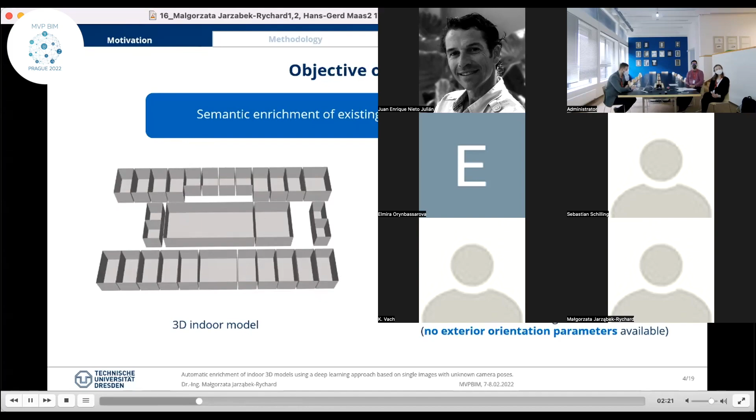The goal of this work is then a semantic enrichment of existing indoor models by window objects, using information provided by RGB images taken by hand using an amateur camera. A very important assumption underlying this methodology is its feasibility for consumer application. This means that the images are assumed to have unknown camera poses. The innovative idea of the presented solution is a parallel semantic recognition of the target objects in the image with their automatic positioning in 3D space.

Our approach goes beyond pure texture matching and matches deep learning detection techniques with camera pose estimation and 3D object reconstruction. The algorithm starts with a joint detection of window target objects and the spatial layout of the corresponding room. The layout of the room extracted in the image is then matched with a 3D model. This allows us the 3D reconstruction of the detected windows, which is solved by photogrammetric projection. And finally, the extracted window objects are subjected to global regularization.

The presented methodological pipeline of image processing starts with the detection of chosen indoor objects in the RGB image. Besides target windows, we also aim at the detection of walls and ceilings, which are crucial for the extraction of the room layout, so of the edges of an indoor cube. To perform this detection task, we apply Mask R-CNN, a robust deep learning detection framework.

The results returned by Mask R-CNN at that stage are partially overlapped and also can have irregular boundaries. To improve these drawbacks, we apply morphological difference and subtract wall objects from the ceiling, which allows us to obtain a more regular ceiling shape. And in the last step, we extract the ceiling outline.

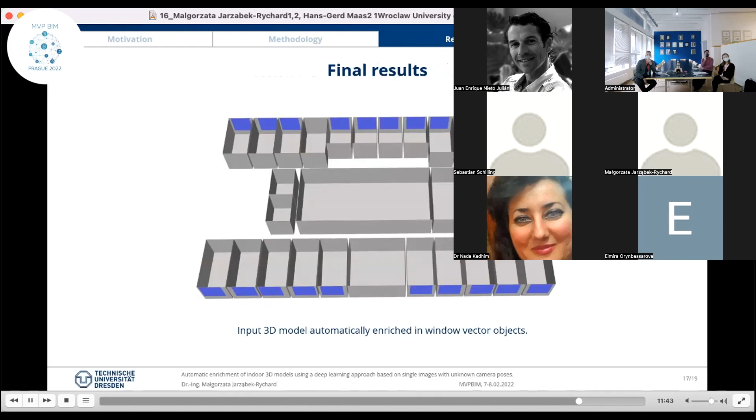The final result of the presented approach is an input indoor model enriched in a vectorized window object. The visual assessment demonstrates that the presented approach can preserve a high accuracy fit between the objects detected in RGB images and the input 3D model.

As a summary, I would like to highlight the most important findings of the presented research that was dedicated to the automatic upgrade of existing indoor 3D models using the information extracted from RGB images. The new insight of the research covers the parallel estimation of the image exterior orientation parameters with the recognition of target objects and their 3D reconstruction. To solve these problems, we propose a novel methodology that employs deep convolutional neural networks together with projective photogrammetry.

Although the presented experiments are focused on windows, the algorithm behind can be easily adapted for other planar objects, which are usually visible in indoor scenes. The evaluation of the procedures shows that the method allows for the estimation of the camera poses with a median value of nearly 14 centimeters for the camera position and around 1 degree for its orientation.

The quality assessment of 3D object matching reveals 3.6 centimeters of the mean approximate distance that indicate a high correlation between extracted object points and the reference data. With these results, we confirm that the proposed approach can achieve effective integration of vector 3D models with objects detected in single images, which are acquired in indoor scenes.

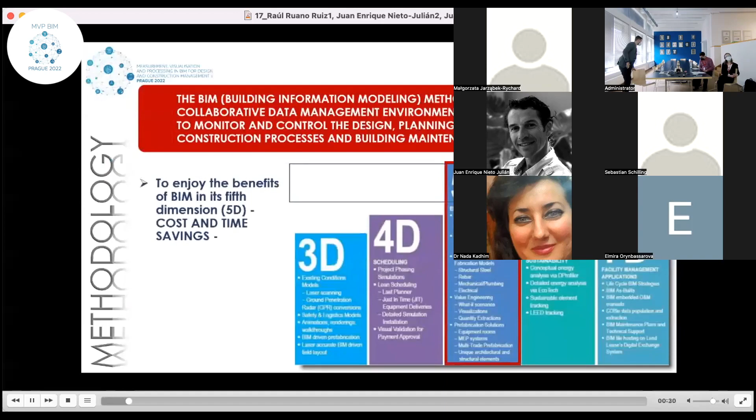The BIM, Building Information Modeling methodology, moves in a collaborative data managing environment to monitor and control the design, planning, cost control, construction processes, and building maintenance. But to enjoy the benefits of BIM in its fifth dimension, 5D, cost and time saving, it is essential to properly plan each phase of the project and manage the information effectively within the same team.

This research aimed to validate an effective method from the creation of the information of a constructed entity using code disaggregated by budget line item, necessary for the mapping of data in the structure of the IFC, Industry Foundation Classes, and the confrontation with the filter rules in quantification software. Specifically, define the entity of construction element of the model by creating a coding and parametric description of the budget item. All elements will be mapped following an IFC structure and using the ECOP standard.

They are involved with a consistent and technically rigorous data structure, which facilitates interoperability between BIM software. Finally, this information will be collected in the 5D BIM software to compare it with the information established in the rule corresponding to each item. A considerable number of applications for the evaluation of construction costs coexist in the market.

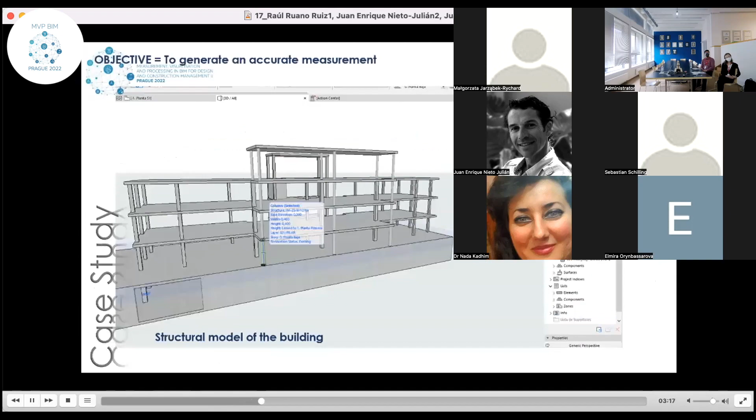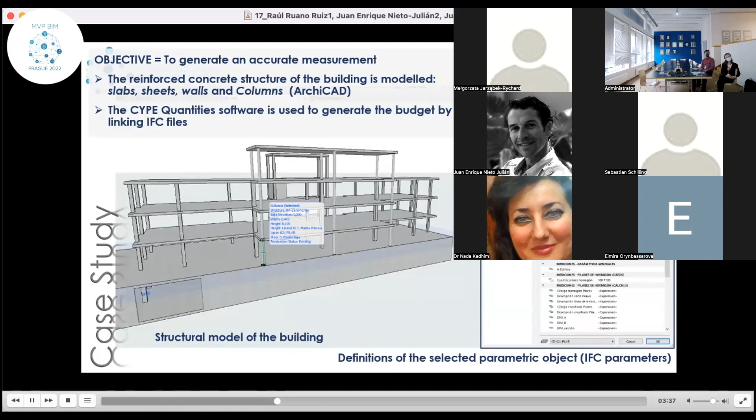For it, a building with 4 floors above ground and one basement level is chosen to generate an accurate measure of the structural model, modeled in ArchiCAD. The CYPE Quantities software is used to generate the budget by linking IFC. To create a twin information to the budget database, specific parameters are created as pre-established variables: material type of concrete and amount of steel. Other parameters, section and height, are given by the same BIM platform.

The database is created using the CYPE software, in which different budget items for columns and reinforced concrete walls will be organized. Various classification systems have been used for the elements of the BIM model, ArchiCAD classification and CYPE, the latter being essential for interoperability with quantity software. The image below shows the classification of the column P37. In the ArchiCAD Property Manager, the data are parameterized for the creation of code and description.

The reinforced concrete column code property is generated by concatenated data: fixed code plus coding according to concrete plus coding according to amount. The reinforced concrete column description property is also generated by concatenating fixed text followed by the code, based on the specific parameter selected.

In the list in the Property Manager section, specific categories have been created to contain the properties of quantities and measurement. In the case of the column: concrete code, description, concrete column measure line, code from work description. The result of parametrization is the creation of a code and description depending on the selected variable. In this way, a hyperlink scheme is made in ArchiCAD to list the element classification.

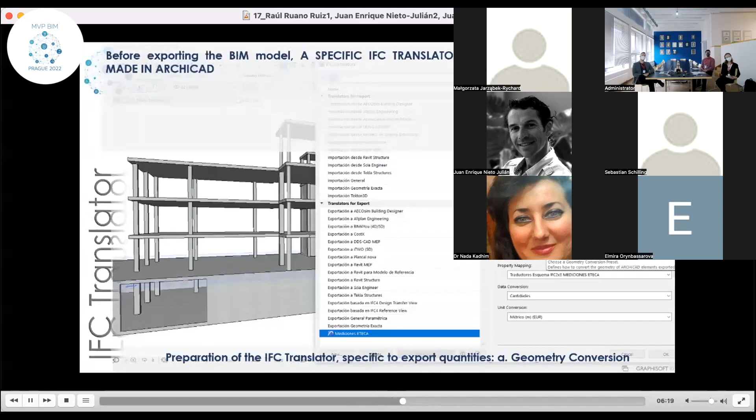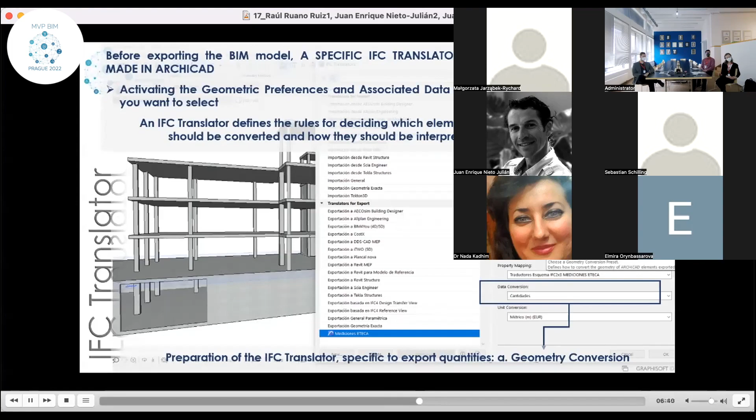Before exporting the BIM model, a specific IFC translator is made in ArchiCAD, activating the geometry preference and associated data that you want to select. An IFC translator defines the rules for deciding which element should be converted and how they should be interpreted. Here you control settings such as the IFC schema, type conversion, present model feature, type mapping, geometry conversion, property mapping, data conversion, unit conversion.

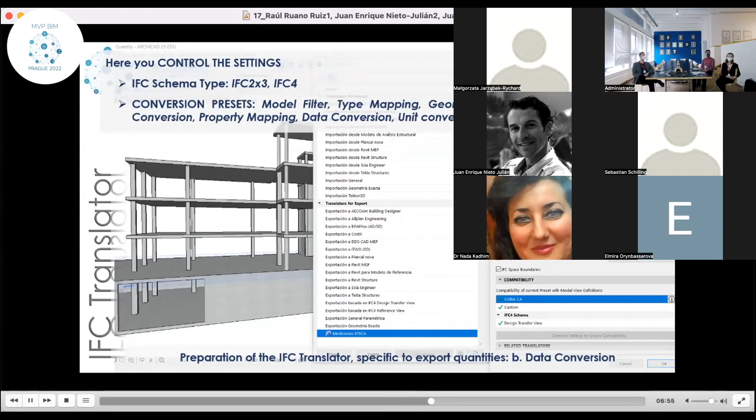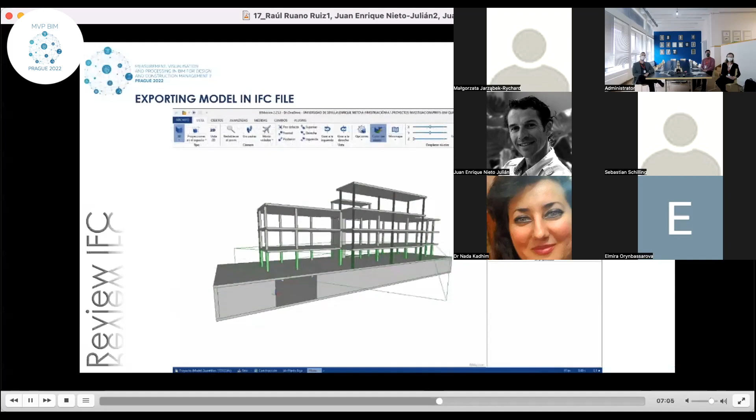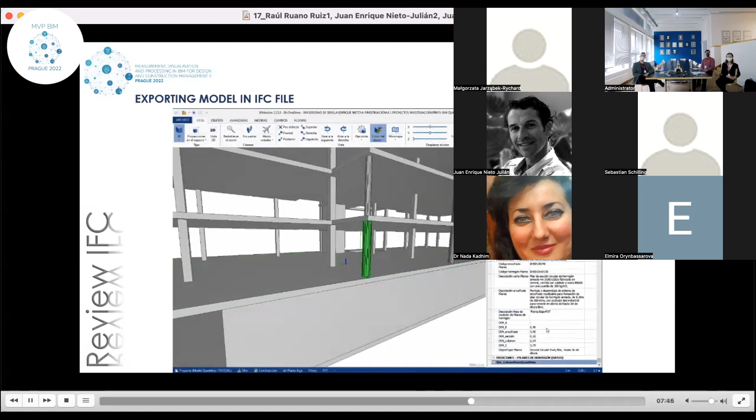The model is exported in an IFC file, and from the IFC viewers on the market, it is possible to review the elements of the model and structured data in the property set. Let's see the exportation. The IFC model is now applied to the BIMvision viewer, where a filter criterion has been established to analyze the type of work, depending on the code or description of the parameter coding or function.

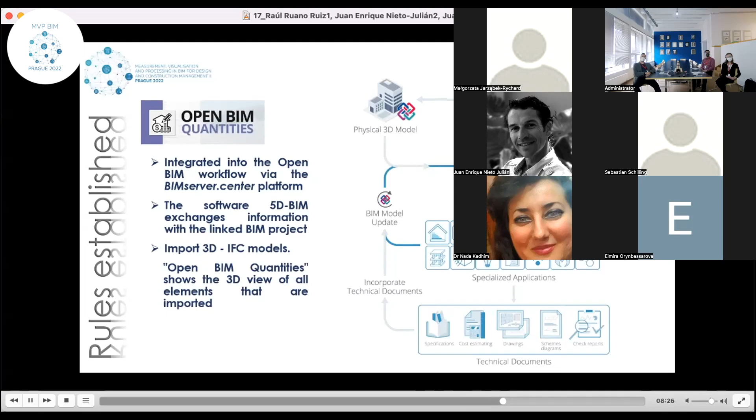Open BIM Quantities is integrated into the Open BIM workflow via the BIMserver.center platform. The software exchanges information with the linked BIM project. Import 3D IFC model. Open BIM Quantities shows the 3D view of all elements that are imported. Quantities has a data collection system that is filtered through rules to identify an element depending on certain characteristics: IFC classification, element name, material, geometry, and relate them to one or more budget items from a price-based file, standard format or property.

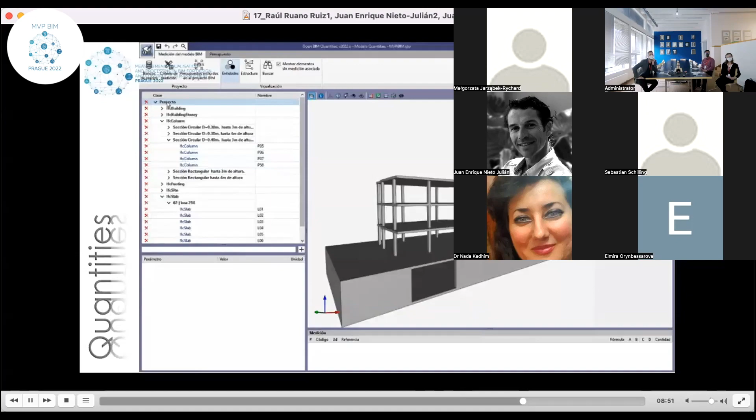In the measure criteria section of CYPE Quantities, a direct relationship has been established for the parameter that meets a code in the budget database. If it is true, it will cross that information with the corresponding budget line, and the export will be automatic.

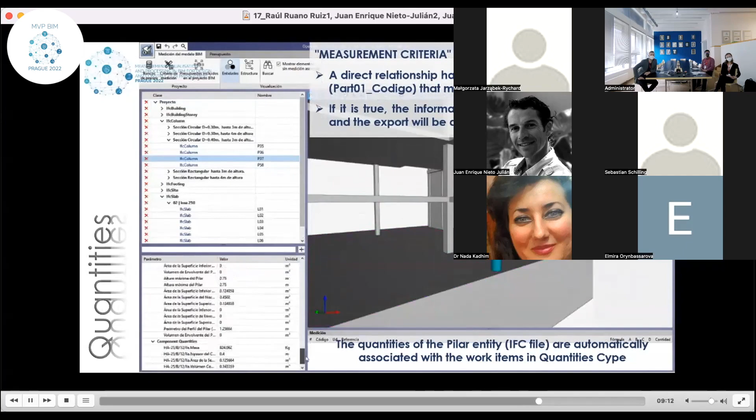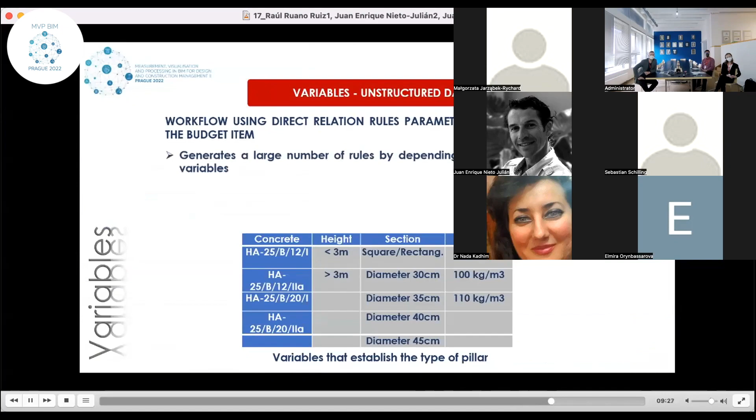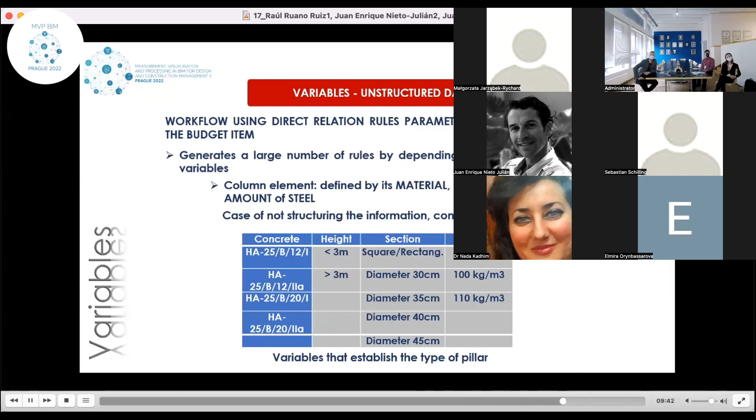The workflow using rules for a direct relationship between the element's parameter and the budget item generated a large number of rules depending on the combination of variables. For example, we have the column elements defining material, section and amount of steel. In this case of non-structuring, the information will have the following combination by type. For the above case, the combinations to create a rule based on the budget item are 120. By applying the proposed system, the number of combinations is reduced, reaching 22. The data sets combine the type of concrete with amount of steel. But if we separated these two variables, the combination of rules will be reduced to the number of system rules.

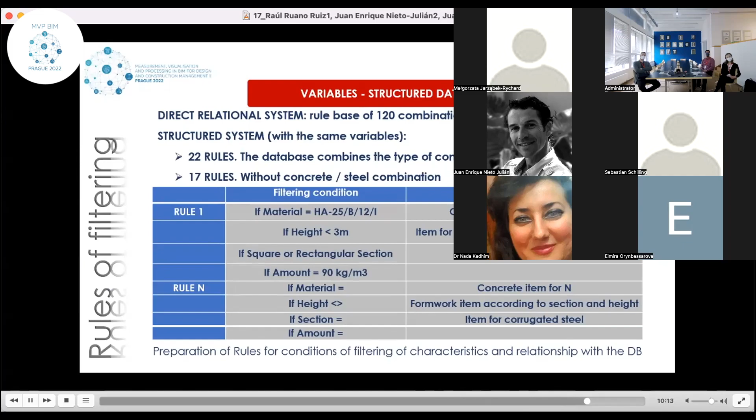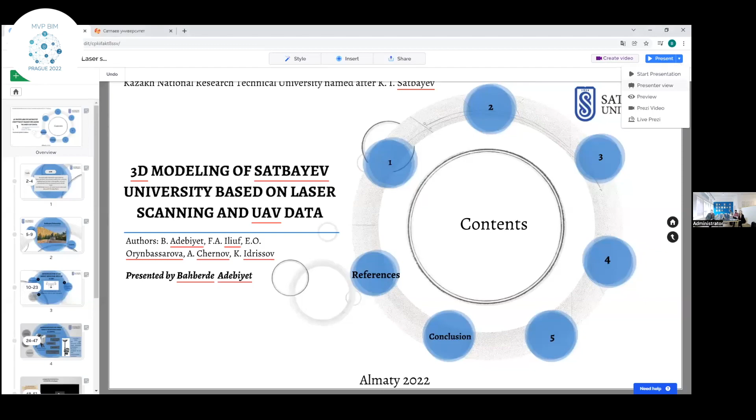Good afternoon, everyone. I am Adebiyet Bahberde, second year master's degree student at SATBAYEV University in Almaty, Kazakhstan. As you can see on the screen, our topic today is creating a 3D model using UAV and laser scanning data. The main goal is to create an interactive, detailed 3D model of SATBAYEV University with VR and AR effects. Also, this work is part of my master's dissertation.

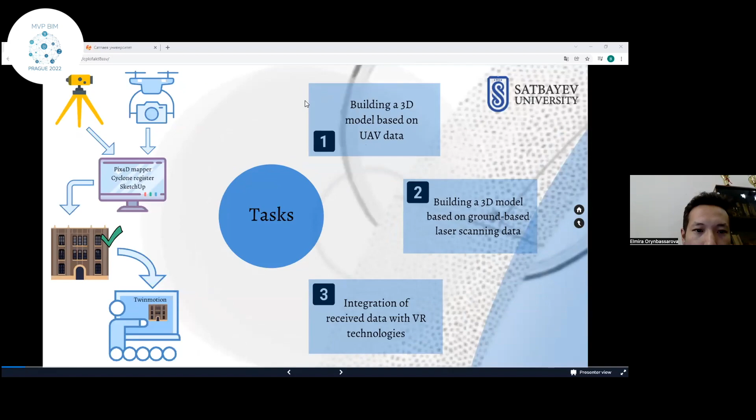Next. My talk will be in 3 parts. The first part is about creating a 3D model based on UAV data. Then, in the second part, building a 3D model based on laser scanning data. Finally, I will talk about integrating the data with AR and VR technologies.

SATBAYEV University. I want to say a few words about our beautiful university. It's located in the southern capital of Kazakhstan, characterized by a mountainous landscape and lots of greenery. SATBAYEV University has historical value in Kazakhstan, as it is the first technical university, built in 1934 in the Soviet Union. It is also named after the great Kazakh geologist Kanysh Imantayevich SATBAYEV.

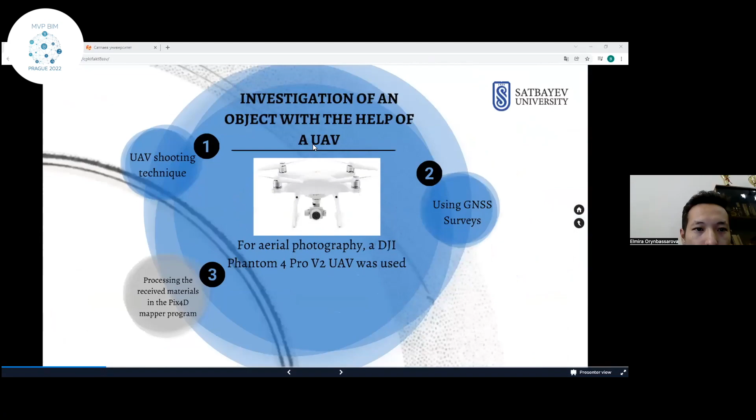Next. Now let's move to the first part of my talk, creating a 3D model with the help of UAV data. For aerial photography, the drone DJI Phantom 4 Pro version 2 was used. The shooting techniques are shown on the right side. The altitude was 80 meters. The camera tilt angle was set to 75 degrees for more overlap and for 3D maps. Total shooting time was approximately 25 minutes.

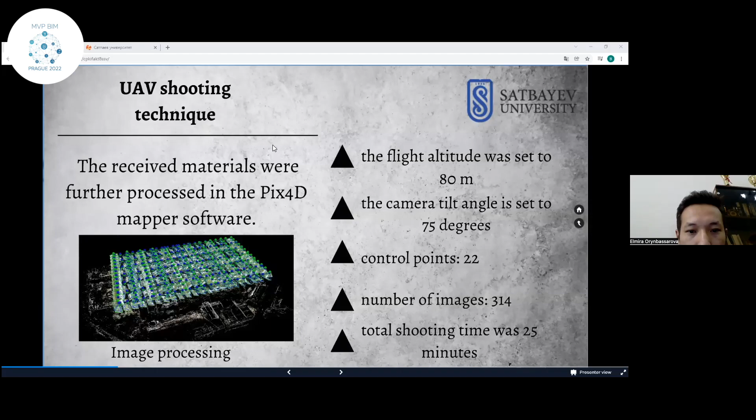Next. For global positioning we used ground control points, GCP, with an accuracy of 1 centimeter in plan and 2 centimeters in height. The device was the Leica GS16, and in total 22 points were captured in RTK mode.

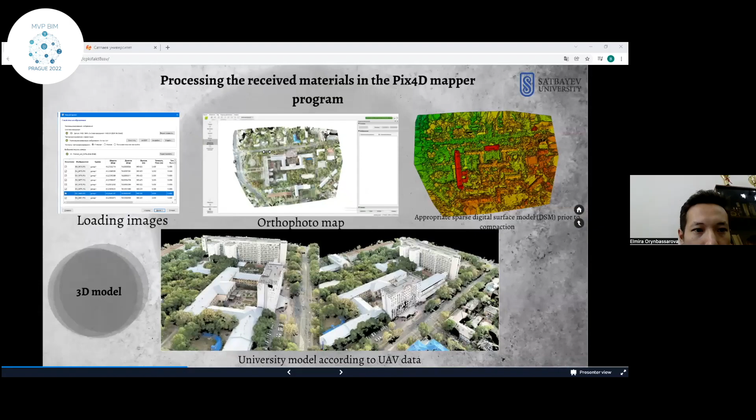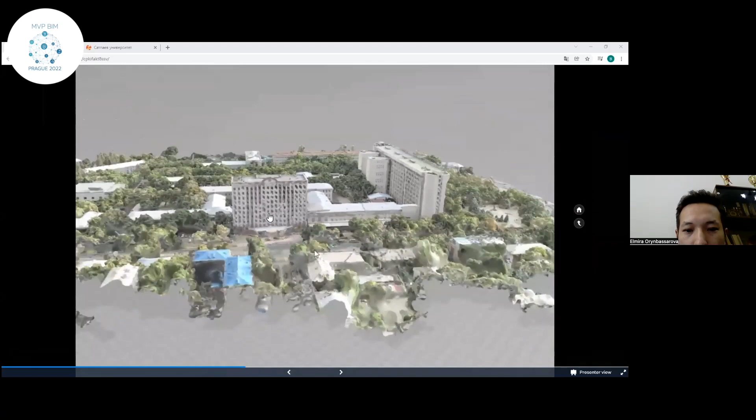Now let's talk about results. Here you can see the basic settings, and also the results as an orthophoto map, digital surface model, and dense point cloud with 3D model. This is the image loading and the quality of the orthophoto map. Also the digital surface model, DSM. And I want to show the quality of our work. Here we have some defects, due to blind zones, trees, and other buildings.

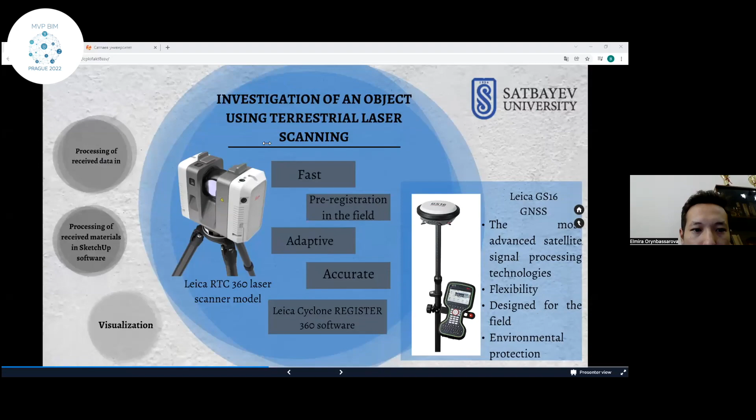Okay, moving to the next part, laser scanning. Nowadays it is one of the best modeling solutions, but at the same time, with a large amount of data, we are dealing with complex processing. Pre-processing we do in Leica Cyclone REGISTER. Scan data from multiple setups is captured with the RTC360 laser scanner and automatically tracked and processed by the unique visual inertial system, VIS.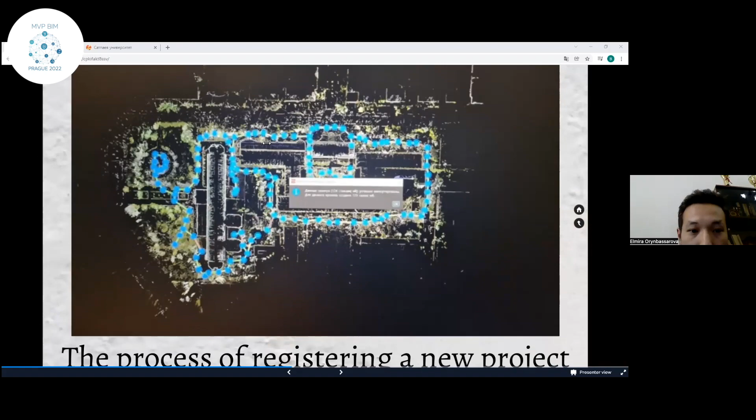This is the Cyclone FIELD 360 app, and our stations are marked with blue circles. Each station has connections in different colors, which show the compatibility of groups. Accordingly, a red line means compatibility less than 20%, yellow between 20 and 40%, and green more than 40%.

During the process, we met some kinds of issues, like shown in this picture. This kind of issue we can also check and solve manually, move vertically or horizontally. Then, after finishing, the software automatically recalculated.

This is a report of our work, which consists of the results of the total error, which is 4 millimeters, overlaps, 41% compatibility, 51%, and compatibility between point cloud graphs.

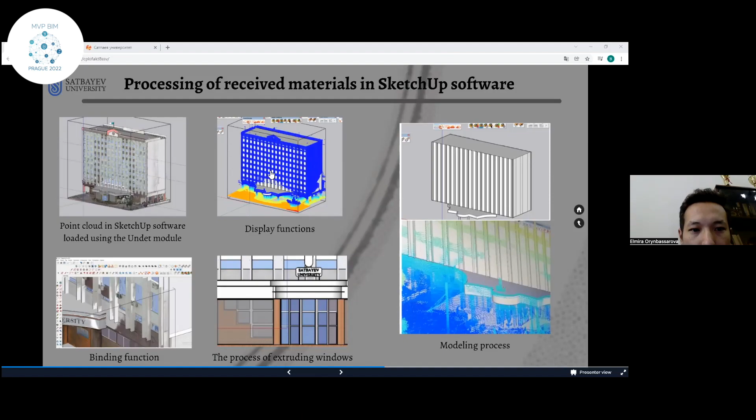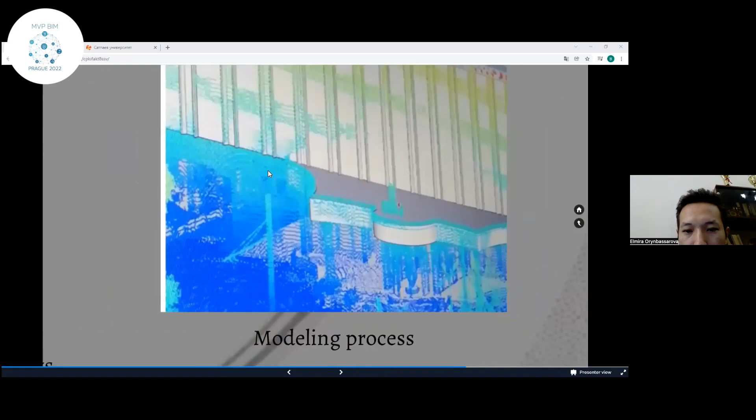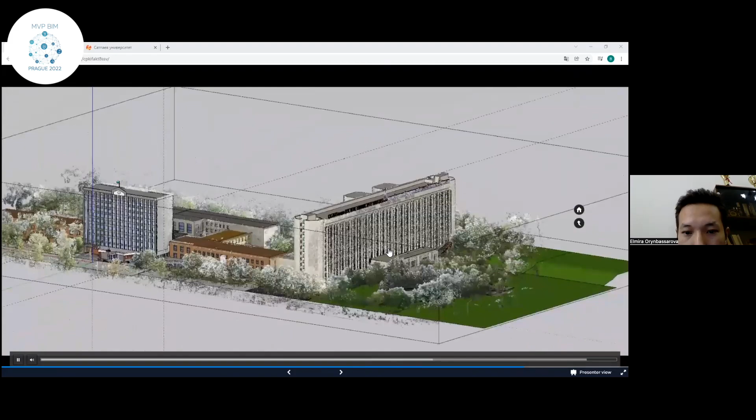For example, our first building named NK, then classified point clouds, digitizing windows, doors, and other pieces of our building. Next, visualization. In SketchUp software, we also add the point cloud and our finished model.

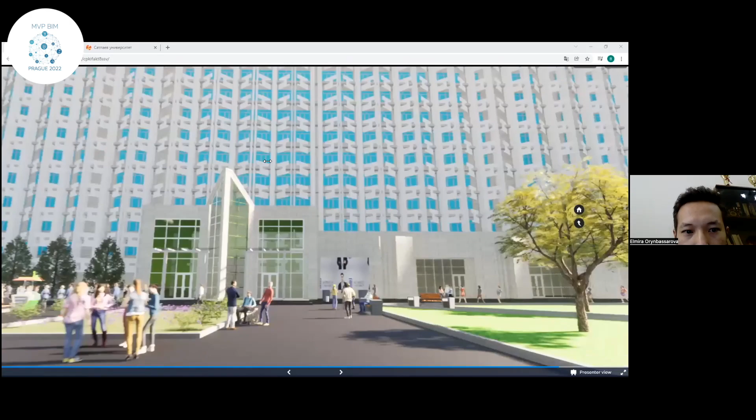Next, integration of received data with VR and AR technologies. There are three reasons why we realize it. First, advertising purposes for new students' building navigation, especially during the year of online education. Due to the pandemic, it's more important to show our university buildings to new students.

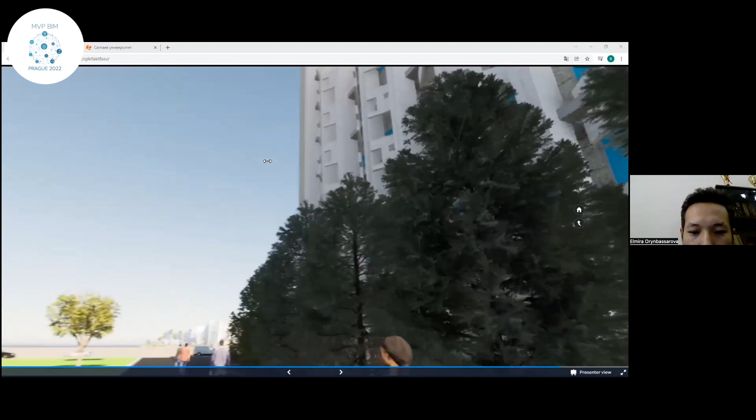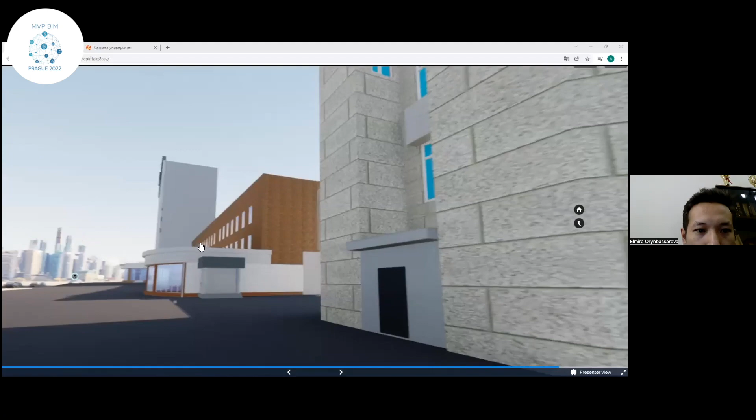Second is for reconstruction work. As I noted, Satbayev University has historical value, and the model allows us to make measurements and calculations in SketchUp software. For building monitoring purposes, further geodetic works or point clouds will be loaded into the model.

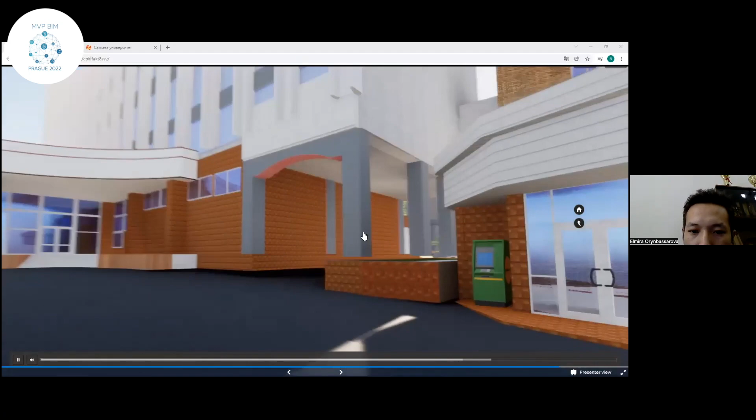In here, you can see our university, this office registration, and the second building is NK, and also our third building named GMK.

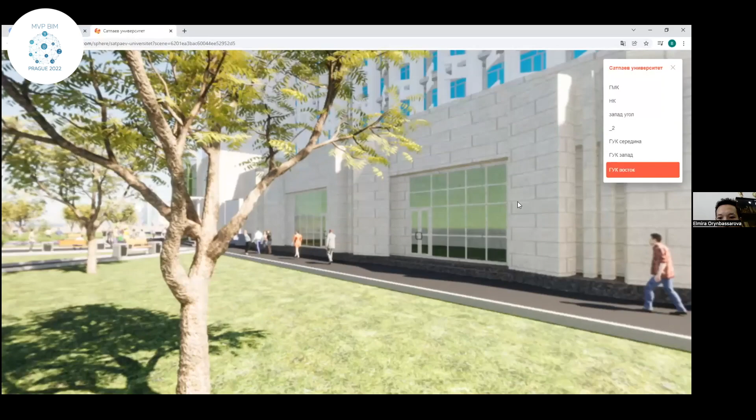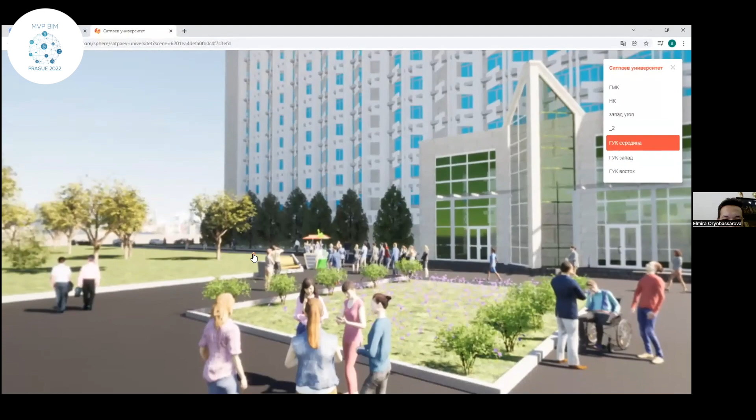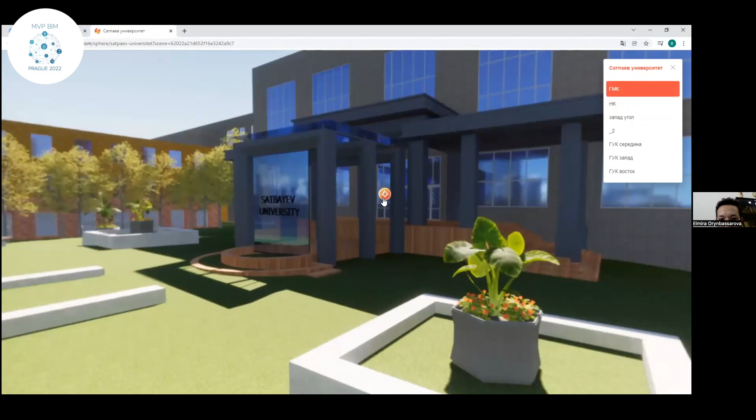Okay, 1 minute. I also want to show our integration with a 3D tour, 3D indoor tour with interactive buttons. Okay, we have panorama scenes, first made in Twinmotion software. Then we also connect with our panorama photos made by mobile phone, and also we move from points and also the indoor model of our university.

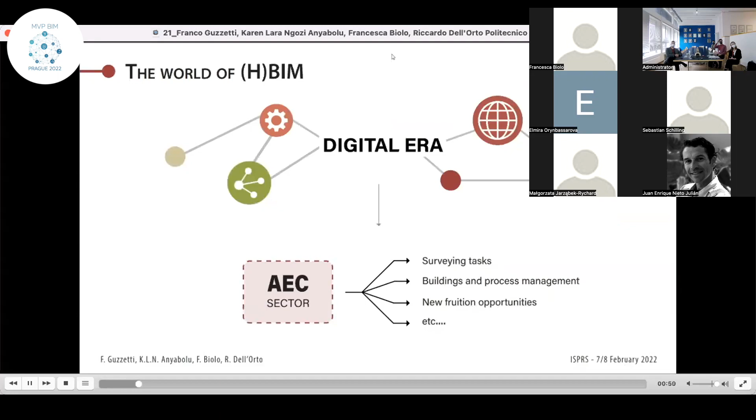A particularly significant revolution was that concerning the BIM approach, so building information modeling. BIM workflow is now part of a common scenario in this sector. The introduction of this tool represents an international reform. As we know, this work process was developed for new buildings and now represents a powerful tool for managing all the phases of the building.

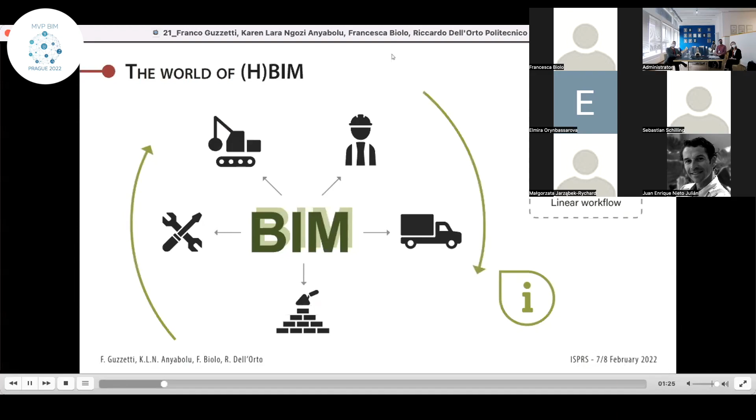BIM represents specific software, and there are now clear and well-defined standards regarding work processes. The use of BIM is now widespread and is often mandatory for all new construction interventions. In various countries, the deadline for the mandatory use of BIM for existing buildings, so HBIM, is increasingly stringent. For example, in Italy, it is 2025. To date, however, it is difficult to think of a standardized approach for HBIM.

The working models born for new buildings have also been adapted to pre-existing buildings, so structures with totally different features. Moreover, these buildings bring with them specific information that can hardly be standardized, like that about history, for example. For us, it's not possible to think of adapting the building approach to an architectural heritage.

The experience gained with the BIM world, however, must be used together with the opportunities offered by this digital era to develop a new approach to the digitization of cultural heritage. It should understand the necessities of this kind of structure, but also enhance and preserve the architectural and information heritage of our territories.

So we started thinking about a new method to develop a heritage BIM model. This work is not yet finished, but it starts from a precise idea, that is to define a standard tool that can also allow the systematization of information that did not find a place in the current BIM. This information is often linked to the history of the building, to the events that characterize it and its specific peculiarities. Not being able to insert such data inside a digital twin means losing part of the assets.

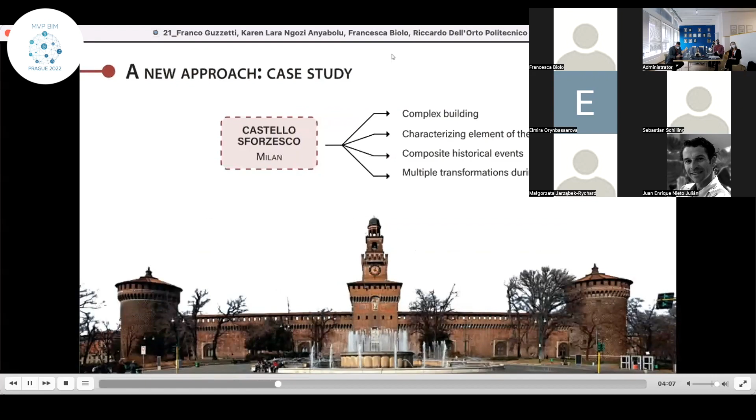So let's analyze it. The general digital object with its geometric information remains at the center. It is a 3D digital model of the building inserted in a BIM-GIS system and completed with a series of information layers, independent in the level of detail. As we said, the central 3D model is completed with these levels. The latter deal with all the information assets. They are all data you would expect to find in a BIM model.

But in addition, always in the digital copy, it is necessary to transmit this information by loading it with the historical factor. Finally, we also find all the information strictly connected to architectural heritage, such as documentation, history, previous interventions, and so on. Layers are treated following the needs of the different information, homogeneous within a single package. Indeed, the various types of data may require different methods and processing techniques.

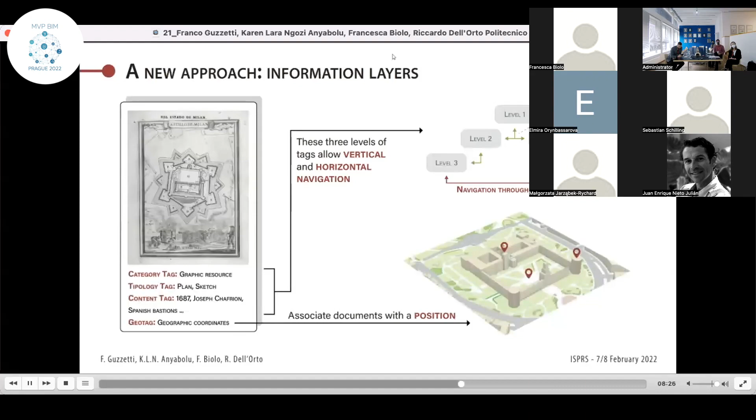On 3 of these tags, those of category, typology, and content, we base the organization of the material and its use. Documents can be researched through a vertical navigation by material type or through a horizontal navigation suggested on the basis of the content tags. Finally, by using a geotag for each document, it is possible to visualize the information on the central model. Based on the content of the document, a pin will be created that refers to the architecture in general or to a part of it.

A further part of the work deals with solutions for making digitally available not accessible or not visitable places, and to offer a digital alternative to the traditional visit. This part of the work was dedicated to setting the way of use for digital objects through ICT solutions, such as augmented reality and virtual reality. This solution is spreading a lot as they exploit the new digital habits of people and technology now so common, such as smartphones and mobile devices.

This study was made on our case study, so on closed spaces of the Castello Sforzesco, exploiting modern survey technologies like laser scanning and photogrammetry. The idea is to report on the digital twin the indication of the spaces of which there is a digitization product. In a BIM-GIS environment, a point or a surface element will suffice for this operation.

So this object can be completed with attributes that describe the available material, including a link that refers to an external web page or an application on which the material is imported, where the real virtual experience takes place. We find a particular page that offers this opportunity, that is Three.js. This solution allows obtaining both an information system completed with the connection to the virtual insights and a portal accessible outside the environment for more touristic use.

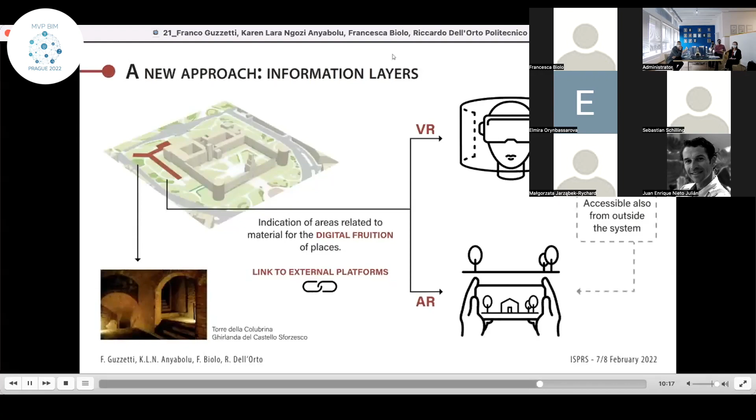The last in-depth analysis concerned the organization of information relating to external systems that interact with and affect the architectural asset, such as greenery, infrastructure, paths, and much more. These types of information levels become support tools for decision. For this section, the typical features of the GIS world and its software have proven to be an optimal solution.

For the case study, a simple trial was carried out analyzing the relationship between the Castello Sforzesco and the surrounding greenery of Parco Sempione. The goal is to verify how these two systems interact with each other and whether the root system can be a threat to the already fragile structure of the underground Ghirlanda. Summarizing the operation, the data relating to the trees were introduced in the GIS environment, especially the depth of the roots in relation to the tree species.

For each tree, a buffer was set on the basis of the root depth, thus observing the critical points of the interaction between the greenery and the underground structure of the castle. This information provides support for the maintenance operations of the structure, indicating the most fragile points, for example.

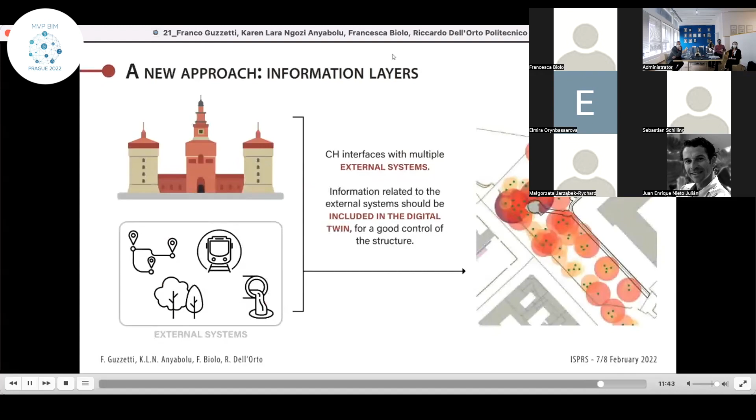These insights are only three, but the information levels that can complete the digital twin of a cultural heritage are many. Other important information is that relating to the historical and architectural evolution of the building, the mapping of degradation phenomena or the structural instability, information about the facility, and much more. The work done so far is only part of a larger project that will continue in the future.

And as we said, the idea behind all this is the belief that it's necessary to review the idea and the structures currently used for the heritage BIM, opening up to other more flexible solutions and perhaps more respectful of the tangible and informative heritage that we are dealing with.